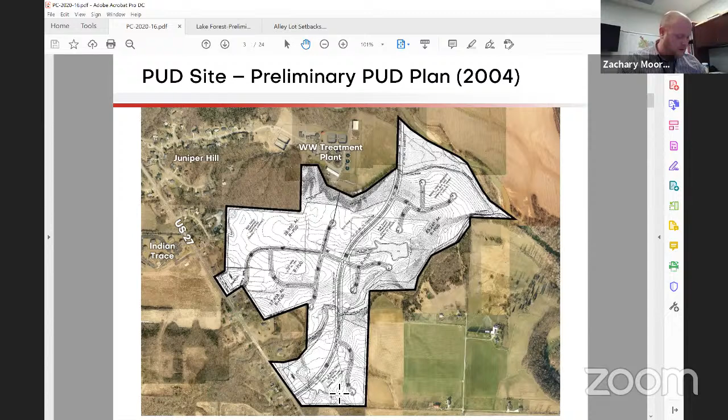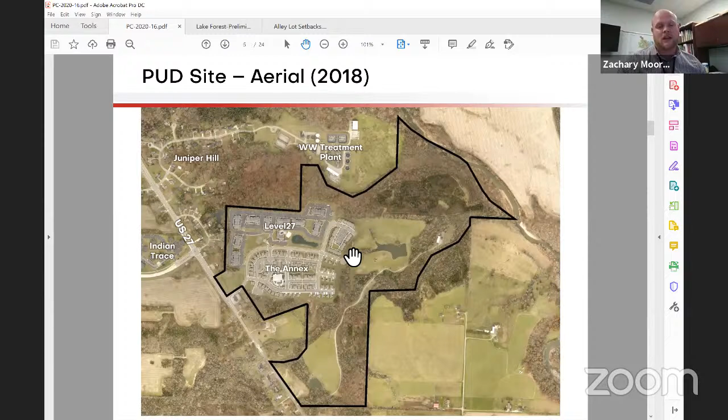Looking at the location, you can see that identified here in this black line. It's a rather unusually shaped site—I would liken it to a horn shape. This is very much influenced by the routing of Lake Forest Drive, which was a recently constructed street.

Hopefully all of you have gotten a chance to see it. And the alignment of that street followed the original PUD plan that originates from that 2004 timeframe, back when it was under the county jurisdiction.

Just to quickly note, you can see the little fine point up here that rests against the right-of-way that was recently dedicated. It's a 60-foot wide right-of-way for that new street, Lake Forest Drive. That's what's leading to that very fine point up there. But that basically leads up to, I believe, Magnolia Drive right here, and Sassafras Drive here, and then Southpointe Parkway is where Lake Forest Drive connects. That basically turned what was previously a cul-de-sac into a T intersection at that location.

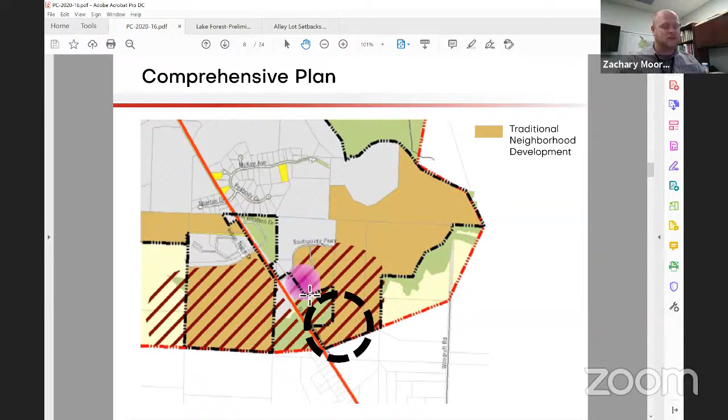Looking at the bird's eye view, you'll notice most of the site is depicted here. This also shows a rough, though not exact, representation of where the new Lake Forest Drive street has been constructed and the right-of-way dedicated for that. You can see the site is divided between two field areas, one adjoining US 27 and Lake Forest, the other with just Lake Forest frontage. There's a drainage swale down the middle with some vegetation along it.

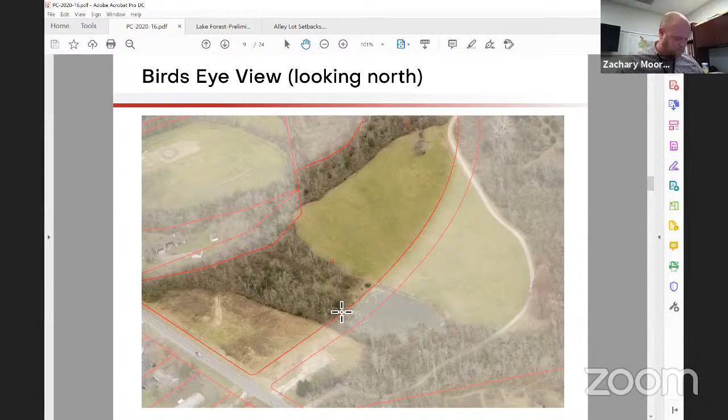Okay, and then some site photos for you. Here you can actually see the new street that was constructed. The aerial photography hasn't been updated yet to reflect that street, so you kind of have to imagine what's there. These photos were taken on October 16th, back in the fall, so you can see the trees on either side of the road.

This is a look at the drainage swale that goes underneath Lake Forest Drive from the existing pond that's there, and leads in a northern direction, flowing into Lick Run, which then flows into Four Mile Creek to the east. And here's a photo of that existing pond and the stormwater management structure that has been built there.

So this was a city project in a sense. This road was built with TIF funds, and it also included a turn lane improvement along 27. So southbound motorists on 27 have a separate lane they can enter in order to make a left-hand turn onto Lake Forest Drive.

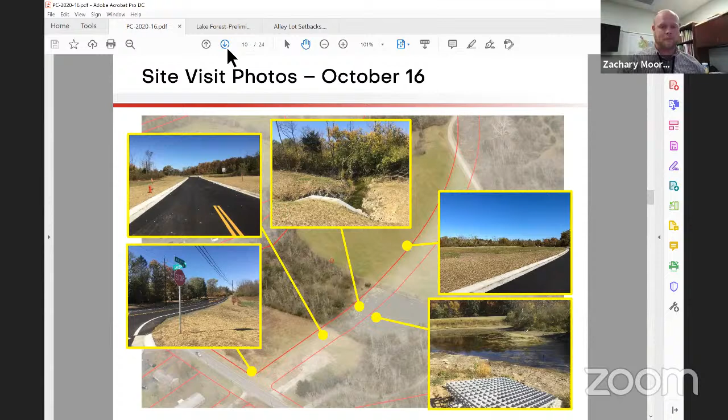Okay, so diving into the site aerial. Again, this is a little under 12 acres in area, about 55% field, 45% wooded. There's approximately 564 feet of frontage along 27, a little over 1,400 feet of frontage on Lake Forest if you terminate it at the R4 zone, which is in close proximity to Lick Run where it intersects the site at this location. The frontage is a bit greater if you take it all the way up to that fine point that goes up to the annex development. And that's a 60-foot right-of-way width that was recently dedicated for that new street.

The sanitary sewer - there's currently no sewer available to the site. So in order to service the proposed uses, the sewer will need to be extended at the developer's cost. As I understand it conceptually, that sewer will need to be extended from the wastewater treatment plant, which is to the north, along Four Mile Creek and then along Lick Run, eventually joining up with Lake Forest Drive. I'd guess roughly in this location here. I believe the infrastructure plan shows where that comes in.

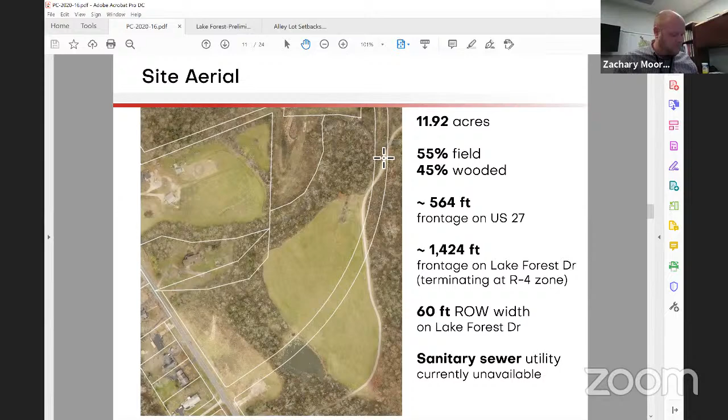So here's a look at the submitted site plan. The developer is showing 36 detached units, divided between two different phases. They intend to build the eastern phase first - they call that Phase 1, for a total of 24 units. Phase 2 is to the west off a separate cul-de-sac, containing a total of 12 units. The resulting density for this development is 3.02 dwelling units per acre, which falls within the original 2 to 4 dwelling units established for that very early preliminary PUD plan when it was under the county's jurisdiction.

The R2A zone actually allows up to 7.26 dwelling units per acre. If you do a rough approximation for how that translates to dwelling units - taking away 15% of the site as a good rule of thumb for area needed for infrastructure - that equates to roughly 73 units that could potentially be accommodated under the zoning parameters. There are a lot of other factors at play with this site, not just zoning, but if you just look at the zoning density aspect alone, the zoning can prescribe up to 73 units maximum potential.

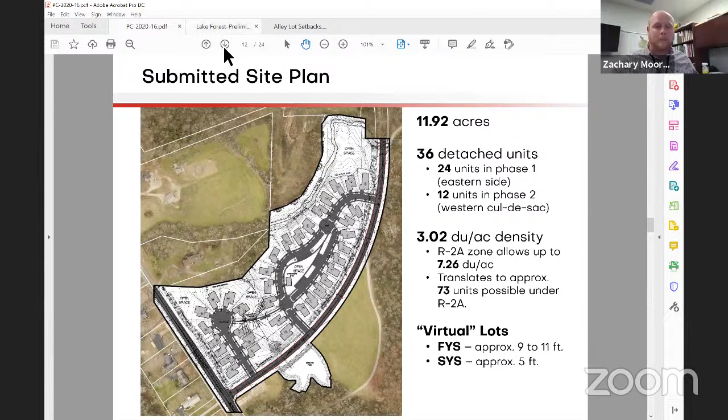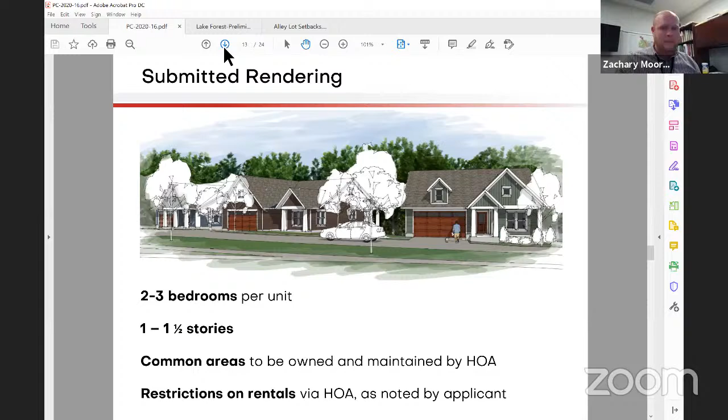However, our concern, which we share with the city engineer, is the spacing between that cul-de-sac street and the intersection with US 27, which is only shown to be about 133 feet. We feel that's probably not adequate, given that Lake Forest Drive is destined to become a main artery connecting to a lot of future dwelling units, not just the ones proposed for this site, but other areas that are part of that original PUD as well. We feel there should be more spacing allocated to provide sufficient stacking distance for cars waiting to turn left onto 27.

Presently, it's not a signal of any kind, it's a stop sign. So motorists wanting to turn left onto 27 and go south toward Coleraine may have to wait a while before they get a break to make that turn. Thinking about the future and future demand and traffic that will have to take this route onto the nearest arterial, which is 27, we feel this should be set up as best we can for the future, allowing additional room in case improvements are needed, whether increasing turn lanes or widening the street on 27 or Lake Forest, so there isn't interference from that local street connection.

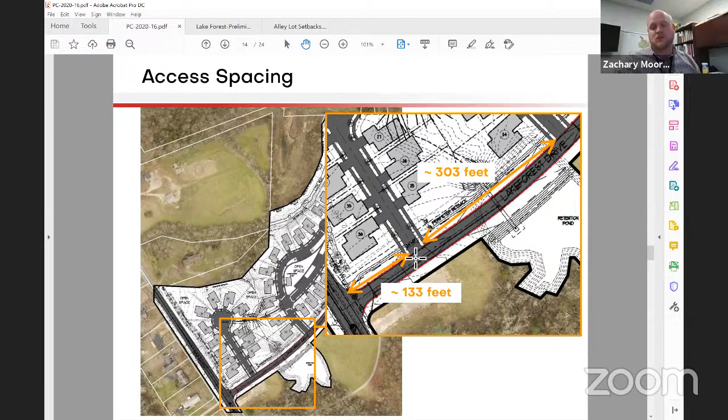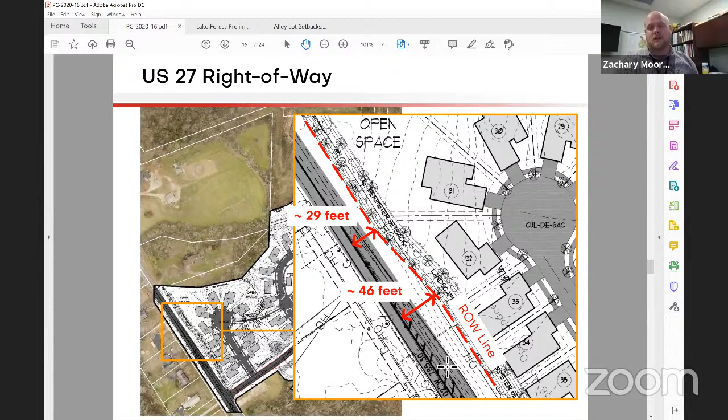If we look to our thoroughfare plan, which prescribes the adequate right-of-way widths per road classification, you'll find it's identified as a principal arterial number 1 along US 27 - a rural principal arterial. That calls for a section that's 120 feet wide, which equates to 60 feet on either side of the center line. So we're asking the developer to dedicate their half of the 60 feet, meaning areas that are deficient, whether it be 29, 46, or 25 feet, should be made a parallel line that is 60 feet from the center line of 27, stretching across the frontage of the site.

Just a quick note on the right-of-way along Lake Forest - we're not asking for additional right-of-way there because that right-of-way was already dedicated. The city was responsible for that, so it's already a done deal and there's no reason to discuss it as it pertains to Lake Forest.

Shifting gears, the next topic is streams and drainage. Lick Run is identified as a blue line stream per USGS, so it is a regulatory stream that flows eastward to 4 Mile Creek. Hopefully everybody had a chance to review the comments from Butler Soil and Water - they recommend a 75-foot setback from the banks of Lick Run to help preserve the riparian zone and the vegetation in that area.

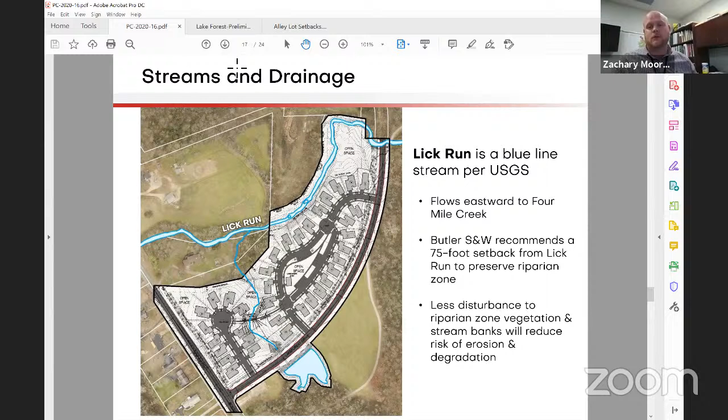Streams kind of have a mind of their own - sometimes they migrate from one location to another. So it's a good idea to have sufficient buffers along those areas to help protect the ecosystem as well as the drainage and flow of those streams, and also to protect future home buyers from erosion-related concerns or flooding that could result from building too close to those streams. We would echo the recommendation from Butler Soil and Water to have additional buffering along that stream.

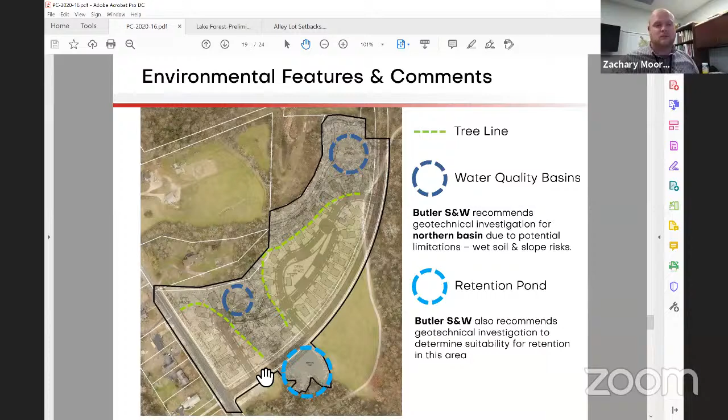Okay, and the tree ordinance. This is a fairly recently adopted set of provisions in our zoning code from last year. We are still in the midst of trying to determine the exact implementation of these provisions and how we can best accommodate the requirements contained in the new chapter, chapter 1148.

Or you can do a survey of those areas and significant trees, those over 10 inches DBH. If they are removed, they have to be replaced at a rate of 1 inch for every 2 inches caliper. But the code also specifies that any new trees planted, which there will definitely be with this development, can count or compensate for the trees removed from the non-exempt areas.

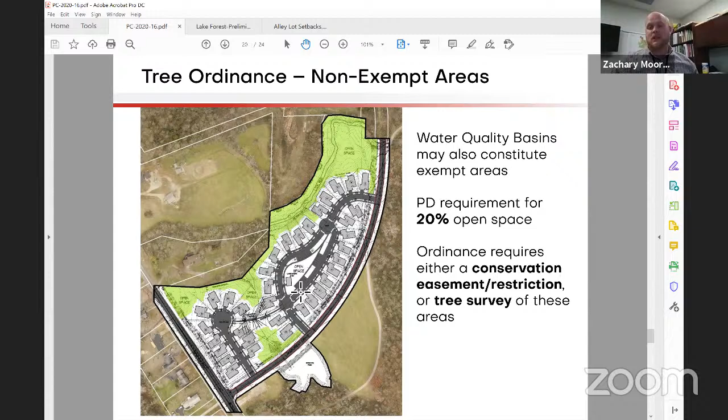And we also feel like the tree ordinance kind of goes hand in hand with the planned development requirement for a minimum of 20% open space, which will actually bring me to my next slide, dealing with the open space and the comparison of that with the buildable areas for the individual units.

In our view, there shouldn't be overlapping there. It should be one or the other: areas that count toward open space and are going to be preserved and not built upon, or areas that are in fact going to be buildable, where you can situate the structure within those individual buildable area footprints that are defined.

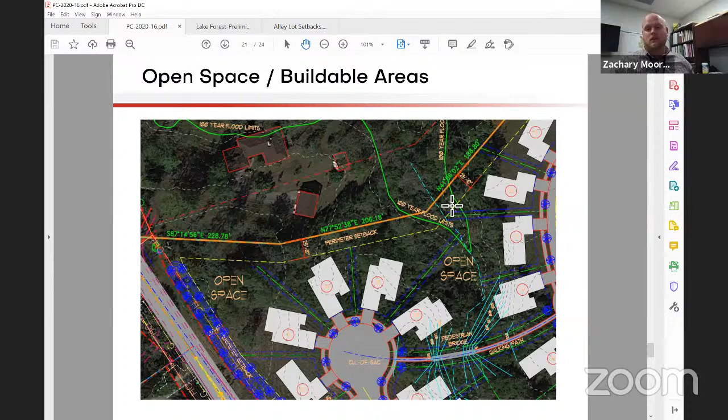So with all of that, our recommendation at this point—again, we feel this is a good proposal at a general level, but there are a lot of tweaks that need to be done and some revisions we'd like to see happen. So at this time, we don't feel comfortable enough to recommend approval.

We think this can definitely be headed in the right direction, and especially once the commission gives direction to the applicant, we feel we can get this to a spot that could potentially be recommended for approval. But at least at this stage, the best recommendation we can provide is to table the application.

This is primarily to give the applicant a chance to address that cul-de-sac intersection spacing—maybe even investigate removing that intersection altogether, and extending the street over from phase one to phase two instead of having the pedestrian bridge, but rather having pedestrian and vehicular access across that drainage way, and not having a second or third access point off of Lake Forest Drive.

Again, we feel the units should be buffered a bit more from the streams and steeper slopes. And we need additional information on the buildable areas, the open space calculation, and getting to a better position on tree ordinance compliance in terms of establishing an appropriate area. I imagine the developer will want to do a conservation easement or set of restrictions rather than surveying individual trees.

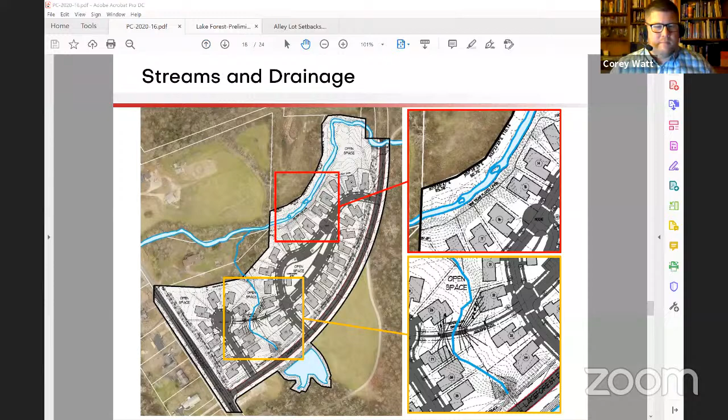If we could go to the next slide, please. So as Zach pointed out, this is a condominium development of 36 single family units. It's in the R2A zoning district, and in our opinion is designed as a traditional neighborhood development, specifically as the comprehensive plan calls for. Our target audience is something less than large lot zoning and something better than duplexes, which would be allowed in this particular district.

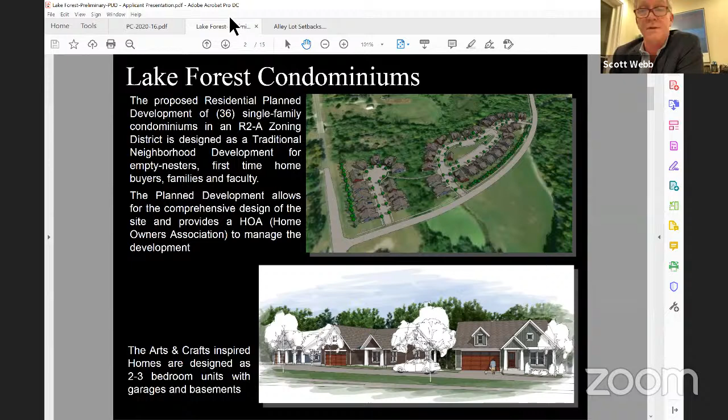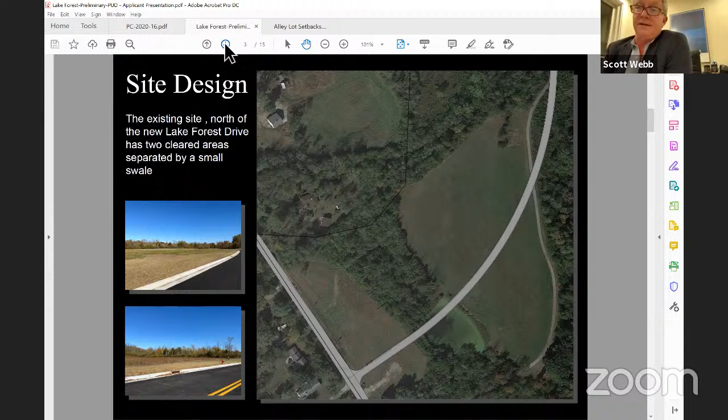As Zach pointed out, the concept here is we're kind of in this horn-shaped area. We have two big clearings. Hopefully some of you have had the opportunity to drive down there and take a look. These are really wide open clearings. You can see that we've essentially tried to drop the development right into those clearings. The homes have been located in the open areas between Lake Forest Drive and the Lick Run waterway.

Sorry, it says Lick Rub there, that's not right. The development is designed as a private neighborhood, internally focused away from US 27 and from Lake Forest Drive. With all the discussion, I'm sure everyone read the staff report about perhaps eliminating the cul-de-sac, perhaps having the buildings along Lake Forest Drive face Lake Forest Drive instead of facing the center, and turning these into driveway lots off of Lake Forest Drive. It's simply not what we wanted to do in this development. Again, Verica Farms was kind of our model, having something more internally focused. And that's really what justifies the cost of the streets.

When we talk about affordable housing, we can get 12 houses on a street. If we eliminate 5 of those houses, we're probably not going to build the street. It just doesn't make sense. We can't keep them affordable when we start cutting the numbers and cutting the amenities and things like that as well.

The staff report kind of intimated that we were trying to maximize the density here. I just want to make sure that point is made, that that's not the case. At an allowable density of 7.5 units per acre, we could literally almost double this. We're allowed to do two-family structures. It's an R2 zone. In fact, through a PUD, we can do any type of residence. So we could simply put more units and have them connected. But honestly, we didn't feel like that was our market, because we wanted to have something a little more traditional in terms of neighborhood look, but with the availability and the opportunity to have zero maintenance, the condo seemed like the way to go.

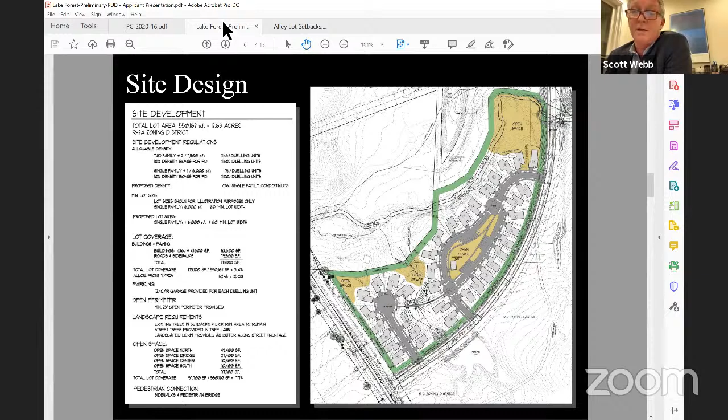Next slide, please. So the site design and connectivity. So the idea here is specifically something different than a traditional subdivision.

Zach had pointed out in one of his slides that we have 564 feet of right-of-way along US 27. If we were to simply develop this as an R2A development, we could just put 9 driveways down US 27 and just have driveway lots and build no streets whatsoever. If we put duplexes in that area, we would have 7 driveways, but we'd have 14 units going down there. So we decided to do something specifically different than that.

And that's the idea of the internally focused design. So the picture down there at the bottom right is actually taken over in the Mason Tylersville area, and it represents how we see our side of Lake Forest Drive with a berm, a tree lawn, and sidewalks. I apologize that the sidewalks weren't on the first presentation. I thought those were accounted for, but I had missed that. So there is absolutely an intention to have sidewalks along Lake Forest Drive. I'm going to let Etta talk about the sidewalks on US 27.

In the notion of trying to protect some of this native vegetation, we decided not to drive over the top of it, and thought we could create an amenity with a pedestrian bridge to connect the two areas. Etta's going to show you some ideas about how we can combine our water quality feature in this bridge to create a unique amenity for the property.

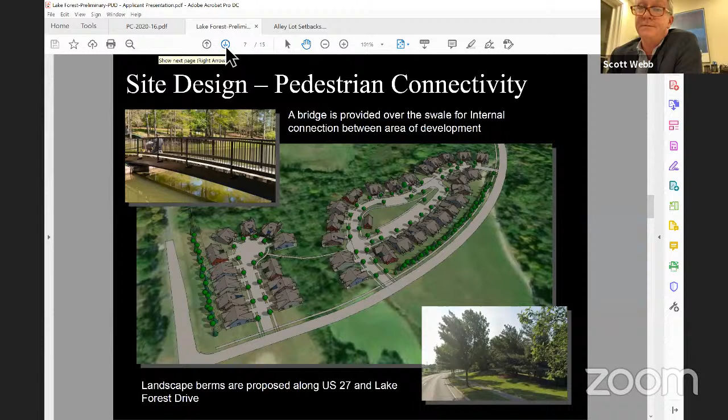So I guess we'll turn it over to Etta now to talk about the connectivity issues. Thank you, Scott. My name's Etta Reed with Bayer Becker, and we'll be the engineer and surveyor on this project. Scott did a great job talking about how we got to the concept that we did, as well as some of the zoning and planning issues. What I'd like to do is touch on some of the technical aspects and concerns that have been raised.

As Zach had mentioned, sanitary sewer is not on the site yet. It is currently under design, being run from the treatment plant up to the north along Four Mile Creek and up Lick Run. That sanitary trunk main will open up all this land, really the remainder of South Point Crossings, for development, because right now there's no gravity sanitary sewer to serve any of that property at this time.

Next, I want to touch base on the access point, the first cul-de-sac. I don't have an exact exhibit, but as staff mentioned, it's about 133 feet from 27 to the cul-de-sac. With the additional 60-foot, providing the 60-foot half on 27, we did have to relocate and shift that cul-de-sac about 25 feet, which would get us up around 160 feet of spacing - space available for vehicles to stack or queue while waiting to get onto 27.

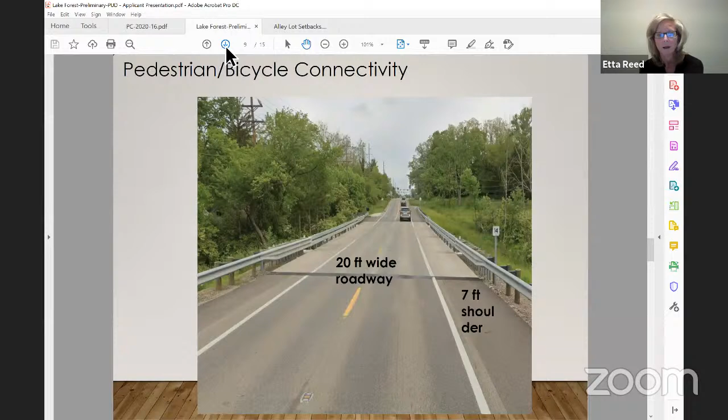So there's a 935-foot gap in the township, and that property is very unlikely to ever be placed into the city. We have inadequate right-of-way there, only 30 feet wide on the half along those 5 parcels, which is not enough room to put the road, get an adequate shoulder, put a tree lawn, and the walk. And the bridge is inadequate. So we're proposing to install all this additional walk along our frontage, and also along the frontage of the annex to connect to Southpointe Parkway, because we feel that's a much safer and much better walk for the residents of this community moving forward.

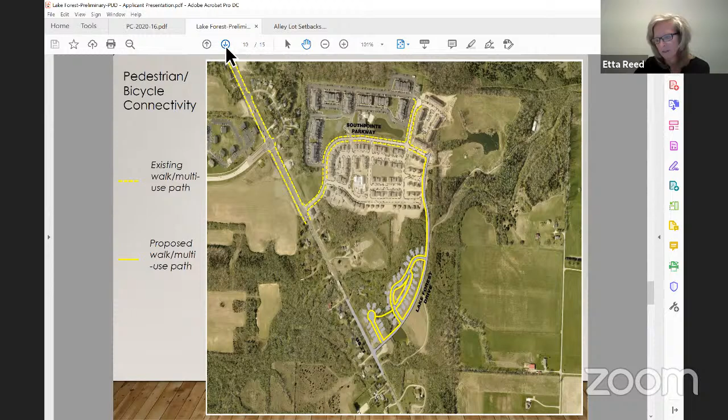I want to hit on a couple of the comments that Butler County Soil and Water had brought up.

When Lake Forest Drive was constructed, it was a joint project with the city of Oxford and Four Leaf Development. Obviously, it's Four Leaf's ground, and it was funded with TIF dollars. The city and Four Leaf hired an environmental and geotechnical firm known as S&ME. They've done a lot of work within and around the city of Oxford, so they're very familiar with the soils that we deal with here.

They not only worked on Lake Forest Drive, but they are also doing the work for the convenience store that's currently under construction. So when we received these comments from Butler County, I immediately reached out to them because they're the experts, asking should we be concerned about what the county is saying, and what do we need to do to change our plan to address these concerns if they are real.

With regards to the geotechnical aspect, I want to start there. The soils in this area are very cohesive and they are not highly erodible. We did not have to do anything to modify the soils or do any excessive work to construct Lake Forest Drive, and they believe that will be the case when we develop this.

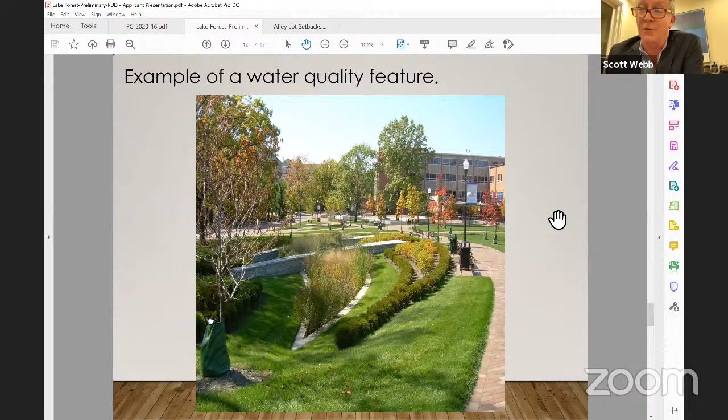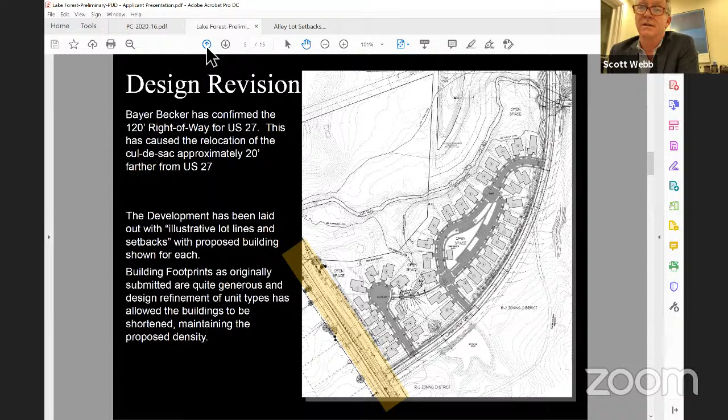That's great, thank you. So as you can see behind these buildings, there's a faint green line that follows the Lick Run creek bed. That is the 100-year flood line, and that has been crucial to our design here. Besides the normal water height we have to deal with, we also have this 100-year flood line, and you can see we've purposefully located this entire development to try to save as much of the trees as we can, but more importantly, nothing is anywhere near this 100-year flood line. We feel that is the standard to be used.

Yes, there's some grade on the back of these lots, but as Etta pointed out, it's something we can handle, and likely an opportunity. So thanks for going back there. Let's finish up now — if you don't mind moving on to slide number 13, where we left off.

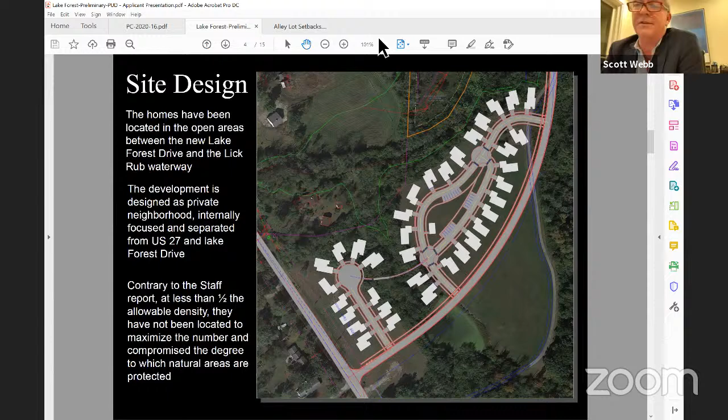We feel that it is compatible with the comprehensive plan. It's pretty much exactly what the traditional neighborhood housing calls for in the land use chapter. We feel that the condominium market is very underserved in our community, so this presents a new housing type. We feel the size and shape are sufficient for the development, and we've done our best to protect the trees and waterways and create pedestrian connectivity.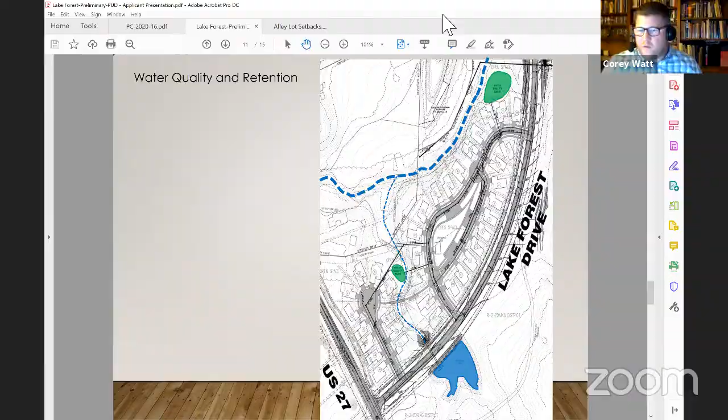Thank you, Mr. Bracken. All right, unless there are any other questions, Mr. Perry, you said we have some members of the public who are on. Will you see, are there any hands raised?

Actually, I should probably give a second because that was a pretty quick turnaround for folks. No, it's okay, there's 3 left. A couple had left. I don't know if you want to close your, move to public comments, or that's all part of the same discussion. So I don't see. We're still in public session, so they would, if I'm not mistaken, have to provide their comments before we close public session and discuss as a board. I don't see any with hands raised.

All right, well, there doesn't seem to be any public comment, so I will entertain a motion to close public session. So moved. I second. Mr. Keebler, seconded by Mr. Dana. All those in favor, please raise your hand. All members indicated aye, so we are out of public session.

Now we're into board discussion, and unless there's any objections from our legal counsel or Mr. Perry, I would like to entertain board discussion and get the perspectives of folks. And then if there's any questions that come up along the way, I'm happy to engage appropriate folks. Ms. Rosenberg.

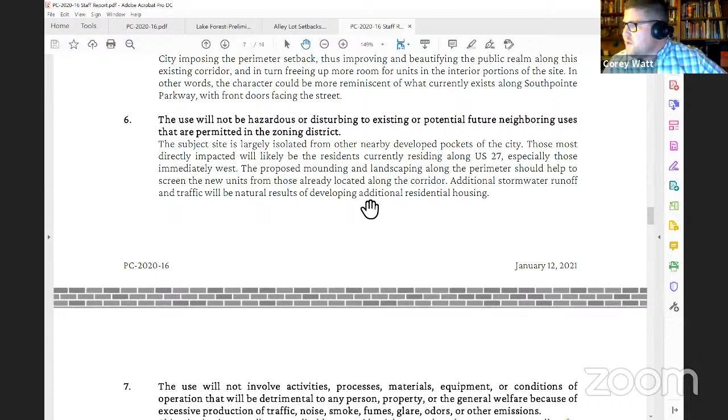All right, thank you. Number eight, accessory uses will be directly related to the operation of the principal uses and will not be operated independent of principal uses.

Number nine, the use and site will adequately be served by public facilities and services such as streets, water, sewer, drainage structures, police and fire protection, and refuse disposal, or adequate provisions will be made to provide for the same services privately.

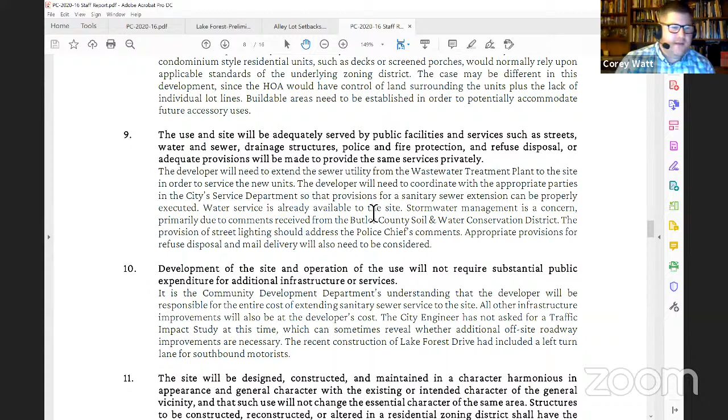All right, thank you. Number 10, development of the site and operation of the use will not require substantial public expenditure for additional infrastructure or services.

Thank you, Mr. Keebler. Number 11, the site will be designed, constructed, and maintained in a character harmonious in appearance and general character with the existing or intended character of the general vicinity, and that such use will not change the essential character of the same area. Structures to be constructed, reconstructed, or altered in a residential zoning district shall have the appearance of residential buildings permitted in the zoning district.

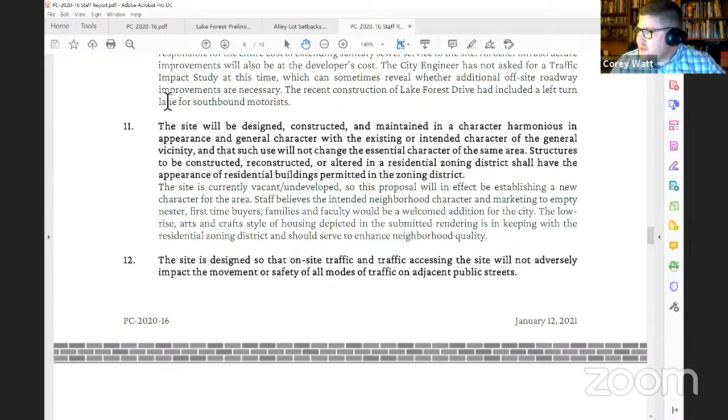All right. Number 12, the site is designed so that on-site traffic and traffic accessing the site will not adversely impact the movement or safety of all modes of traffic on adjacent public streets. I know there was some discussion about that. I believe Mr. Keebler was satisfied. Everyone else seems to agree.

Number 13, proposed construction will not result in the destruction, loss, or damage of natural, scenic, or historic feature of major importance.

All right, and the last one, proposed construction will not result in the complete elimination of existing mature tree canopy. Effort shall be made to direct disturbance and construction around or away from existing mature tree canopy without completely taking away the use of the site or connectivity to existing infrastructure.

All right, there was discussion, thank you, Zach. There was discussion of incorporating the staff recommendations. So at this point, unless there's further comments or questions, I think it'd be appropriate to entertain a motion, and that would, in my estimation, include any, all, or additional conditions as mentioned.

Mr. Keebler? I would move for approval of... what is the name of this? Move for approval of PC 2020-16 preliminary planned development, 1986 Lake Forest Drive, with the inclusion of staff recommendations 1 through 10 on page 14 and 15 of the staff report.

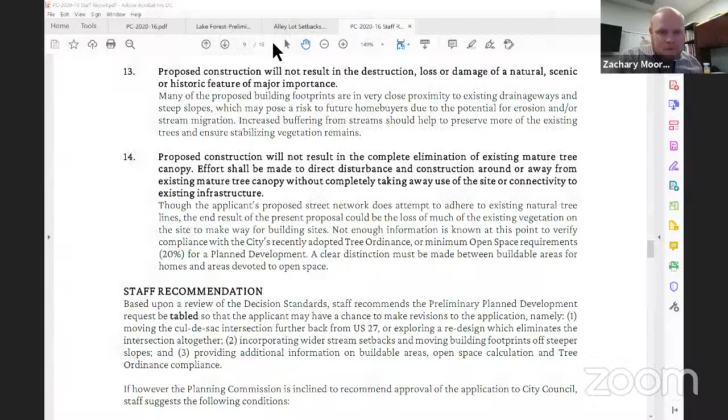Yes, thank you, Mr. Chair, and I will pull up a few slides for the commission. Just bear with me here. So this is a discussion item that we felt needed to be brought to the commission's attention. I am unmuted, correct? Okay, just want to make sure.

This has to do with the alley lots found throughout the mile square in terms of measuring the setbacks on those lots. So to give everybody some background, the four most common residential districts in the mile square areas of town are R1, R2, R3 MS, and the residential office, or RO zones. These are the setbacks currently prescribed by our code in the various district sections, in our district chapter, for front yard, side yard, and rear yard.

For the most part, a lot of these are identical to one another. It's most commonly a 20-foot setback in the front yard, 7.5 feet for the side yard, and 35 feet is always the standard for a rear yard. The only differences to note would be that R2MS has a 7-foot minimum side yard, and then in R3MS, there's a 15-foot minimum setback and a 25-foot maximum setback with a 5-foot side yard. We have some guidance provided in our code in our supplemental section, which is in Chapter 1141, that provides this exhibit as well as a number of written statements about where various yards are to be measured.

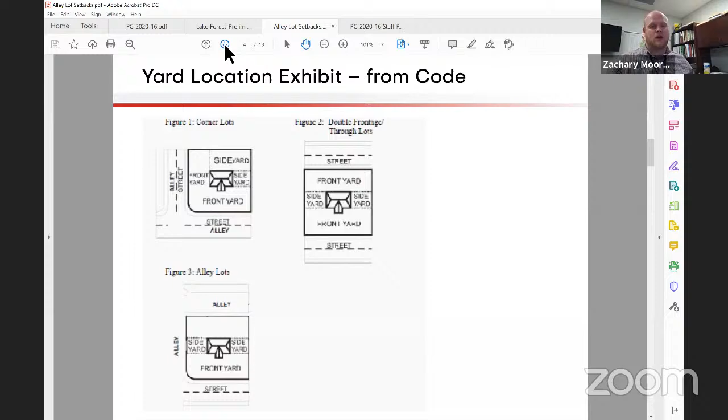Yards and setbacks are related concepts, but not quite one and the same. The setback is the way of effectively measuring the minimum yard, but once a structure is built, the placement of the structure would define how you determine the individual yards: front, side, and rear. This is some guidance our code provides, and what staff has done is put together this exhibit shortly after I started, just to make sense of how the individual yards are measured for different lot types common in the mile square.

And of course, the subject of this discussion item, which I'll try to make as brief as possible but am eager to get input on, would be the type of lots I've identified here in red, which are those that only have frontage on alleyways and no frontage on a public street. So this diagram is demonstrating a typical block layout in our mile square with crisscrossing alleyways and then streets on each of the four sides.

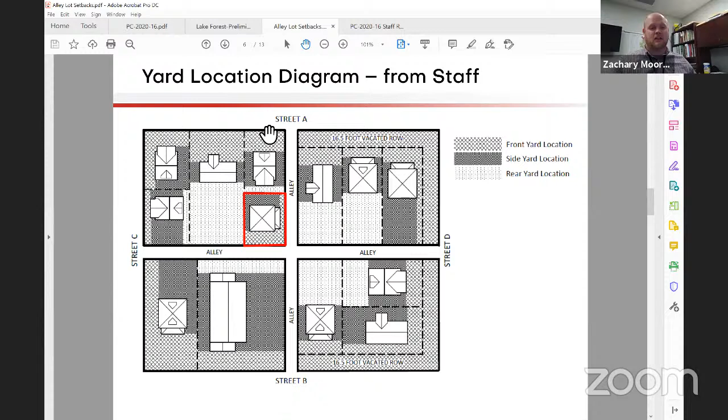You can see that, at least in the diagram that was prepared, the only type of alley lot really considered and accepted as practice for measuring setbacks would be the corner lot on alleys, the type of lot that borders one alley on one side and another on the other. So really what we want to get feedback on are the lots that aren't on corners. But just to give you some examples of projects that have taken place on alley lots.

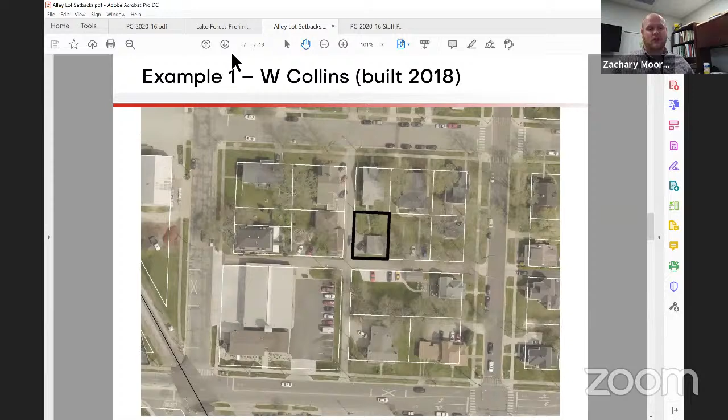So example 1 here, this is on West Collins. This is one that was actually built. It's near the fire station, and this was built in 2018. So here's the location of the structure and the parking, and you can see it's clearly on a corner alley lot.

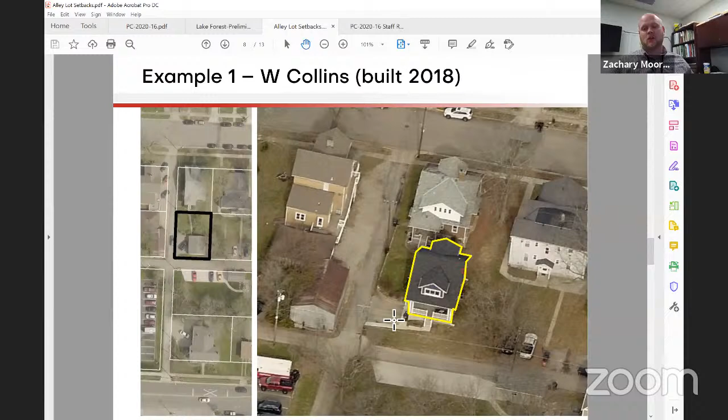I believe the setback measurements for this one, the front yard was 20 feet. I'm not sure what the side yard was, anywhere from 7.5 to 5 feet it would have been. But you can see how the structure had been built, and I believe there was a variance for the parking as well to allow 2 parking spaces in the front yard when normally the code only allows for 1.

There's a few other examples that have either gone through the review process or been through some sort of review prior to this discussion tonight.

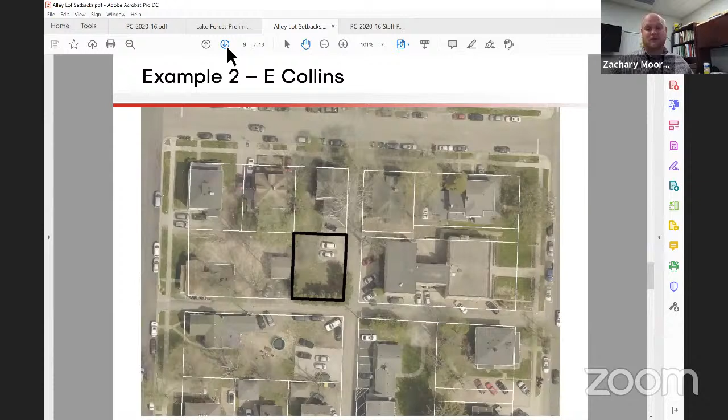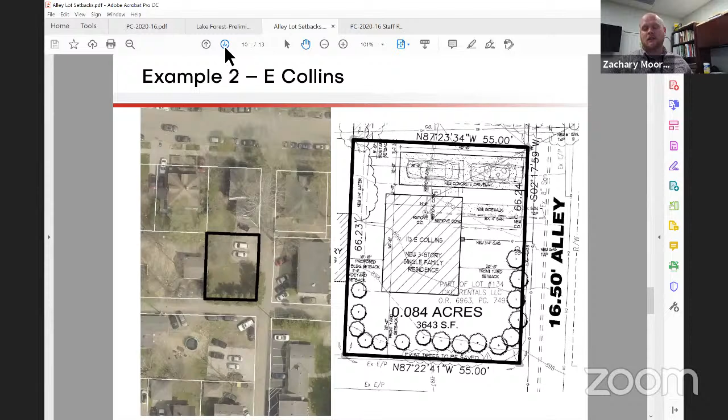Another example is over on East Collins. We received a building permit to build a residential unit on this particular site. Again, that's a corner lot there, and this was the site plan that was submitted, showing meeting the side yard setback effectively from both of the sides, and then meeting the front yard setbacks. So that one was going to be a by right build. It didn't require any variances or anything of that nature.

There was a recent variance over on East Withrow, example 3, and they needed a variance to allow for the 2 required parking spaces in the front yard, and then also they needed some coverage variances for this particular site. But again, this is the one on the corner.

At this time, we're measuring the front yard setbacks for these corner lots pretty much pretending as if they are fronting on public streets. So taking the exact same setback measurements, front and side, 2 sides, 2 fronts, the same as we would a lot that fronts upon 2 public streets on a corner.

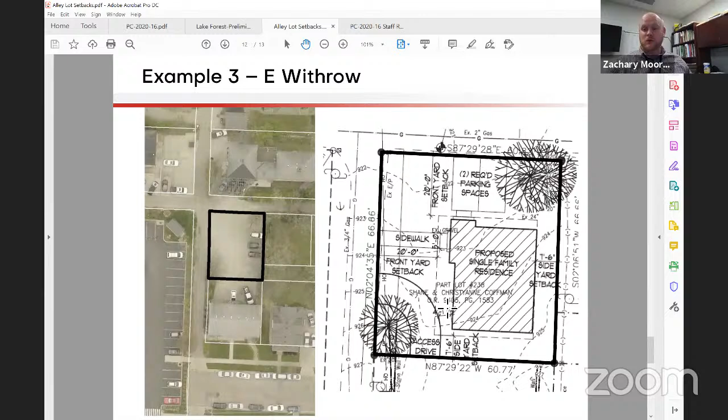But it's become a little bit more confusing for staff when we talk about - here's another example. It hasn't seen any applications at this time, but it's one that we're aware of over off of West High. It has frontage along an alley, but its configuration is more standard because it's not on a corner. There isn't a crisscrossing alley on this particular block.

If this were a normal street frontage here, it would be pretty clear that you take the front from the street, you take sides from either of the side lot lines, and then you take a rear yard setback of 35 feet from the rear. With this particular example, the depth of the lot is shallow enough that the buildable area would be a pretty narrowly confined area once you take the 20 feet and the 35 feet from the front of the lot and the back of the lot.

Our code really doesn't make a distinction at this point about how to measure setbacks differently for these type of alley lots versus lots that have standard frontage on a public street. So at this point, we kind of have a sense for what the practice should be for the corner lots, but when we get into territory such as this, it's starting to make us question whether these setbacks are being applied properly, and whether we need to think about alley lots differently in terms of what sort of setback regulations they should be subject to.

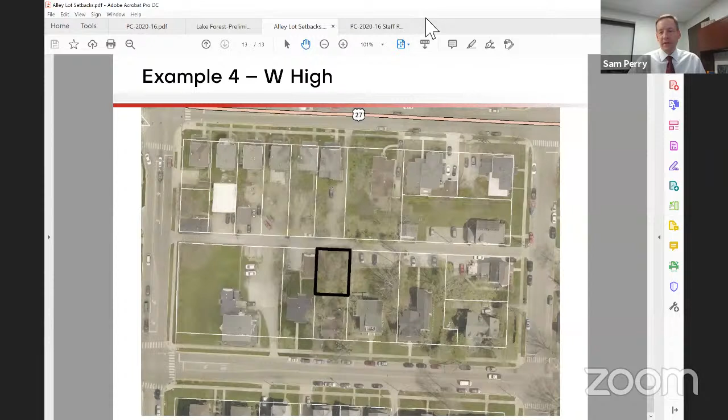So, for example, the last slide there, that would probably be a Board of Zoning Appeals case, and if that's okay, it makes it basically undevelopable without a BZA approval, that's just how it is. If it's something you think we should spend some time looking at, we'll do that. We haven't done a citywide analysis of where these are and how many there are, but we just wanted to give you an idea of what's happening with some of these alley lots that are left over. So let us know, and we'll take it from there.

Mr. Keebler. When that judge made the decision to say if it's a buildable lot and it's within the area, the city used to have an ordinance that said you couldn't put a dwelling unit there if it didn't front on a public street.

It was taken to court and the judge ruled against the city, took the control totally away from the city. These were lots, folks, that were ancillary buildings. They were barns, they were garages, they were shops, as that number one slide showed, where there was a little storage that was used from the old farm store. And all of a sudden, people thought, well, I can buy these and I'm going to start building residences.

The fire department hates it, I'll tell you that. You can't get fire trucks down the alley. They're dangerous. Some of the things that happened uptown in the alley behind the old Snyder's building, those three apartments that got put in there, it's a travesty.

And so don't make it any easier. Don't make it any easier. Make them go to Board of Zoning Appeals and let them turn it down like they did the last one. And hopefully we'll get more turned down, because if you make it easier, you're going to see people trying to do lot splits, more of these. They'll be hunting around, going through the studies, trying to find more lots to build more houses on, where it's a dangerous proposition, folks. So let them go to Board of Zoning Appeals every time.